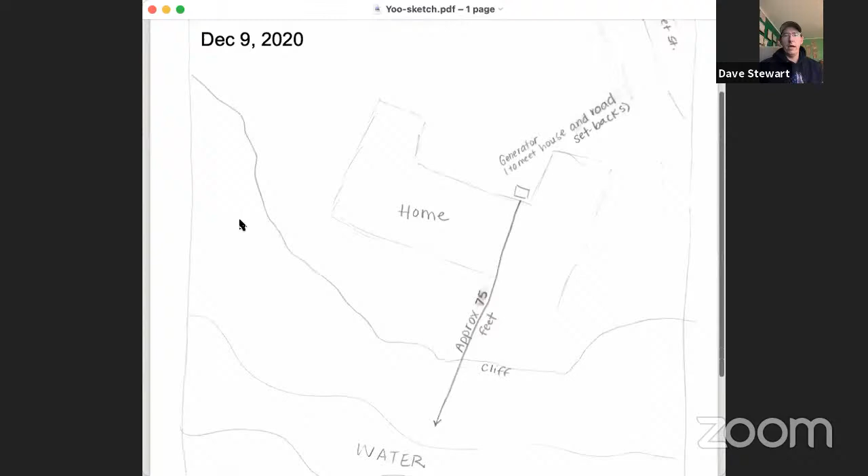Hi, I'm Dave Stewart, DS Electric. We're proposing to install a generator for Ms. Yoo at 62 East Market Street. The location we're proposing is within the setbacks of the wetlands, but the wetlands are actually on the opposite side of the home from where the generator is. So the home is in between the two, as you can see from the diagram. I believe that shouldn't really be any kind of concern. If there were any kind of issue, it would have to actually go through the home in order to be a problem to the wetlands.

All the other setbacks should be fine. The front setback to the road isn't really visible to the house. We have pictures of that too. But basically, it's supposed to be 100 feet, and we're asking it to be shortened to 75 feet. Actually, it's to the stream. The stream corridor is 100 feet on either side of the stream, not the wetland. Gotcha, but that's what your diagram shows — it says water. Okay, I understand that.

The house was built before the 100-foot stream requirements were put in? I was going to ask the same question, but it has to have been. Do we know when the house was built? I don't know when the house was built. Okay, I have parcel access up right now — it's 1925, the original structure was. Yes, it predated zoning, quite a bit. The reality is, today you could not build a house where it is. Not without a variance.

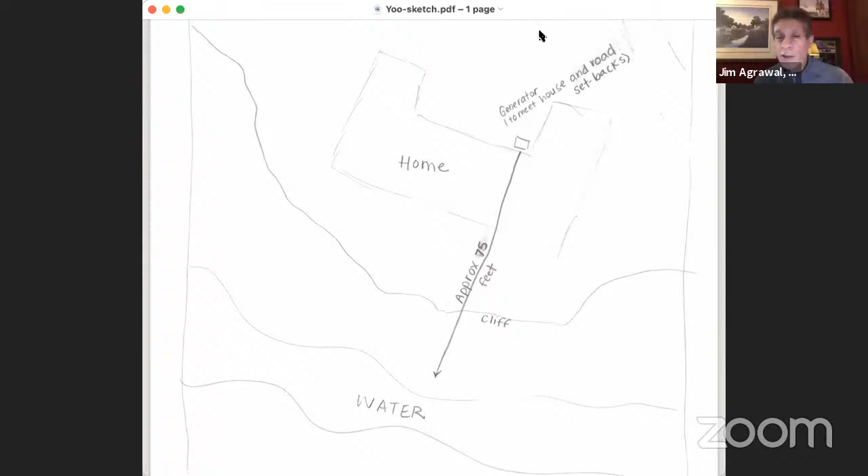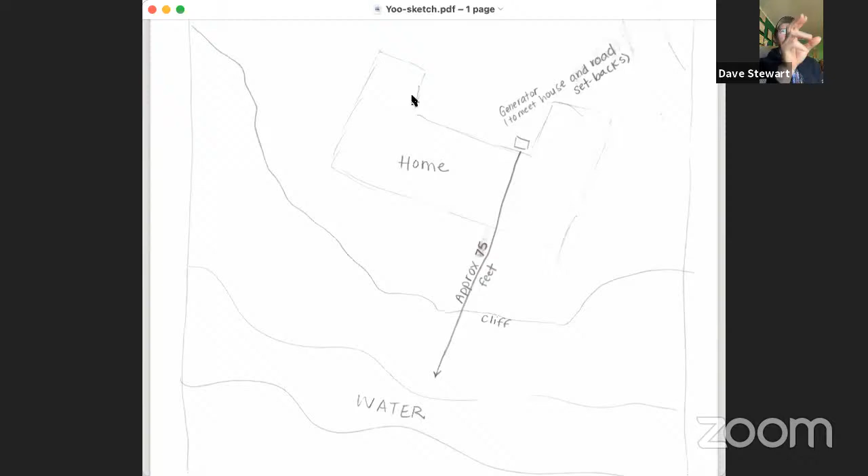Where's the front door in relation to that generator on this picture? So where the generator is, it kind of looks like a U. To the right side of the U is where the generator is, to the far left side of the U is where the front door is. Okay, that's curious. And the driveway comes in right to the north of it off of East Market. This is Pompey Delafield's old house, if anybody's familiar with it. Oh really? I should have known better.

That's a big house. Beautiful place if you've never been inside of it. Oh, I've been in there. He's got a gorgeous house, or he had when he was there. He had lots of affairs there. Now, as a town supervisor, you'd expect that.

So, who haven't we heard from? Jim, Dave, Rich, Paul, any questions? No more. Okay. And have we received any correspondence, Serena? No, we have not. Is there anyone in the Zoom waiting room wishing to speak? No, there is not. And we've asked the board members, the zoning officer. No more comments. And our attorney? No comment. Thank you.

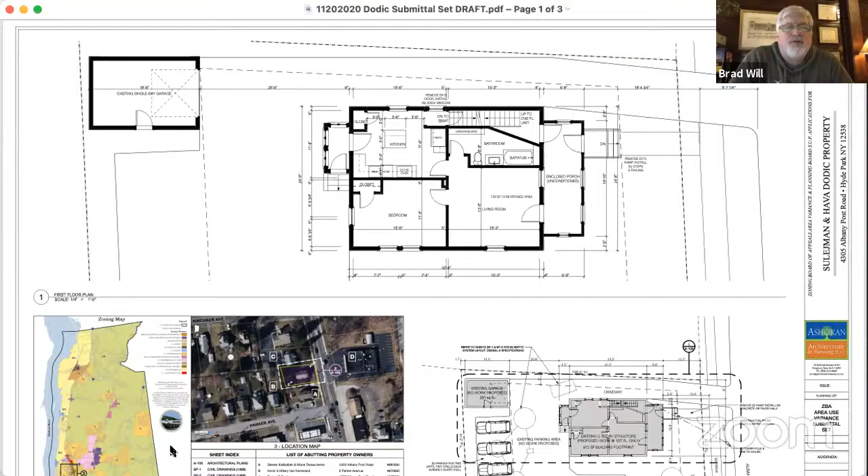So that's kind of basically it. It's a pretty straightforward plan. There's a living area in the front, the bathroom, a new full bathroom. There is an access to a basement there, you see from the kitchen, and also a small mudroom vestibule.

Brad, the front door, I see the entrance to the front door, but the entrance to this apartment, is it under the stairs or where? I'm confused now. You see where it says living room? Yeah, that's the entrance. That's the front door. Got it, exactly, through the porch.

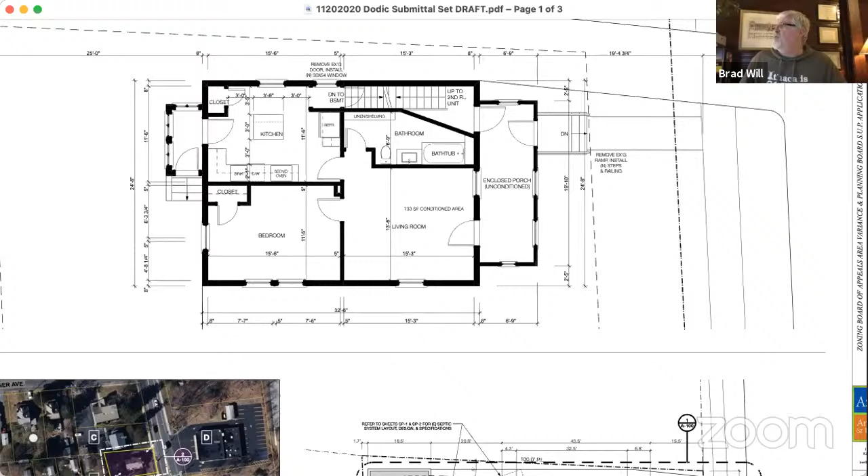You're putting a window where the other front door is, or the door near the stairs. Did I hear you? You're putting a window there? No. Well, if there's a photograph, we're taking that door out and putting a window in. If you look at the sheet, it shows it pretty clearly, I think, on sheet A100. Oh, I don't know why that's A100. That should be A101, sorry about that.

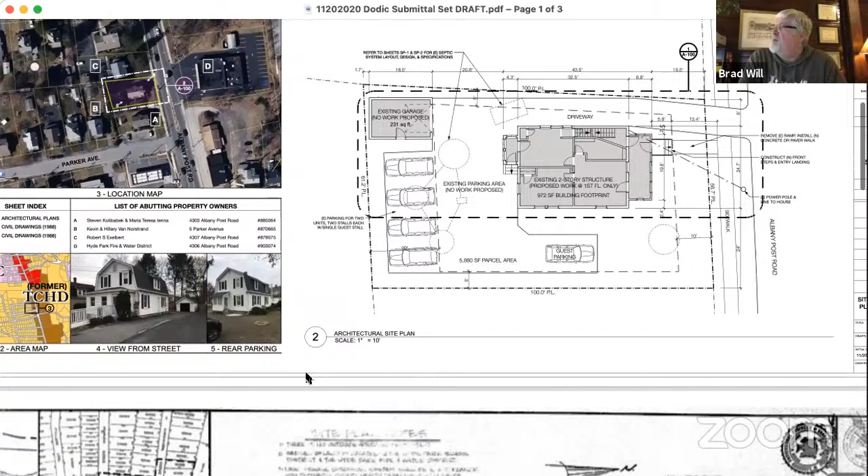So there's a photograph that shows a northeast view from the sidewalk, and there's a note on it that says the door to be removed. You can see that door just kind of floats. It's a pretty hazardous situation right now because there's no landing there, it's right up against the driveway. So it just doesn't make sense to keep that door. So we're proposing that we would take that door out and put a window in its place. I got it.

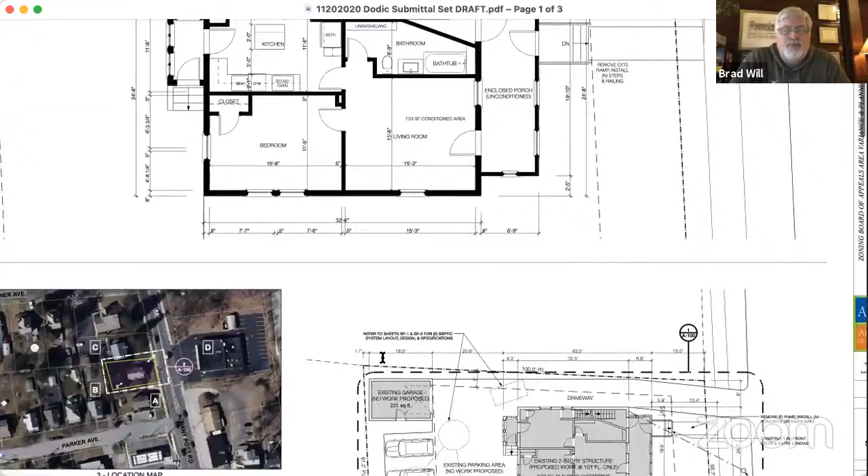Okay, and there's ample parking, as you can see in the back. Plenty of parking for two residential units plus guest parking. I think it's fair to say that there's no impact, and of course there's no on-street parking there in any event. The existing garage will remain? It will, yeah, but there's no work proposed there.

And most of the utilities are in the cellar? That's correct, yes. And if you remove that door to get to the cellar stairs, you got to walk through the house, whether there's a carpet or whatever. Well, we're not removing the stairs though, they'll stay. To get to those stairs, serviceman will have to come through the front or the back door and go through the whole house. That's correct.

You're breaking up a little bit, I'm straining to hear you. Sorry.

Yes, that's correct. I wouldn't want to rent that apartment. Well, I don't know, right where I live in Kingston, when the Central Hudson guy shows up, he has to come through our house to get downstairs to read the gas meter.

We'll put it outside. So other than the removal of the handicap ramp, the exterior will remain the same. That's correct, yes. And the entrance, come in the existing door to the porch, and straight ahead is the entrance to upstairs, and make a left turn and go a few feet, and there's the entrance to downstairs. I got it right? Yeah, absolutely correct.

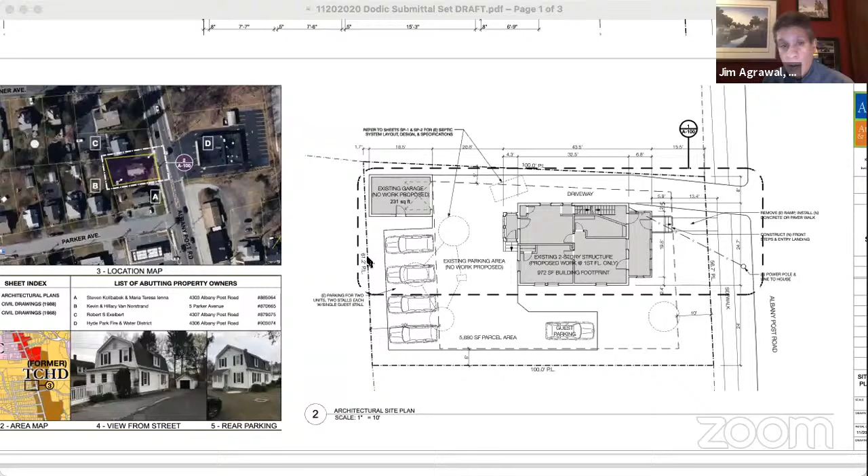Okay, and the back door on the first floor will remain, or you convert it to a window? No, to the kitchen, yeah, that's going to stay, right? Oh yeah, that's a nice amenity to have, to be able to walk out to the back and directly to the parking area. So that stays. Okay, got it.

There's a lot of uses allowed in that district, including this one. So the question for the zoning variance, if I understand correctly, is that we're going from a single house to a 2-unit house on the same footprint? Not quite. Historically it's been a mixed use building, with a clinical use on the ground floor and a residential use upstairs. Okay, so we're going to 2 residential uses of the building.

Two residential uses where the density allowed for this size lot isn't big enough, so you need to relax the density standard of so much per acre. I think it's allowed 12 now, and we're going to 14. That's correct, based on the square footage of the lot.

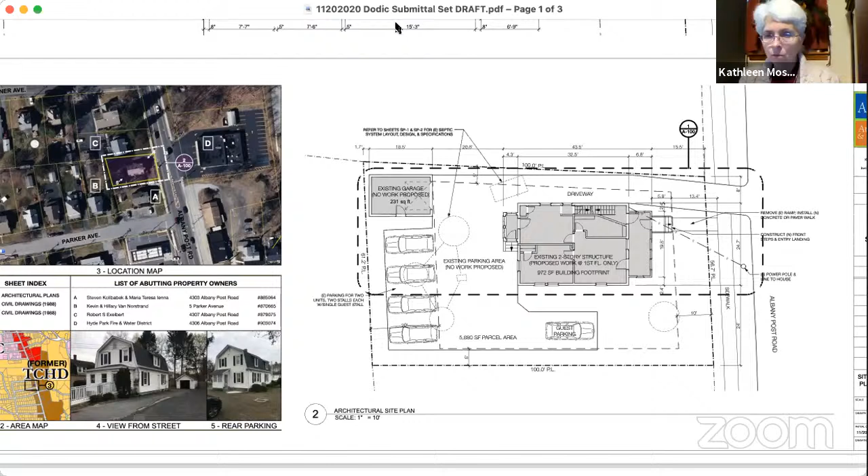So that's the reason for increasing the density. Okay, I get it, that's all we're interested in here. I think we've been through that pretty much. This does also have to go through the planning board for site plan. Yes, that occurs following the entertaining of a variance and acceptance of the variance by the zoning board. That's the process.

So what we're going to do this evening, now that everyone has familiarized themselves with this, is set the public hearing for next month. That will give the public a chance to be notified and to come and participate if they want to. May I have a motion to set the public hearing for February 24th? So moved. May I have a second? Second.

Who did the second for that? Jim. Okay. Will the secretary please poll the board? Herbert Sweet, yes. James Agrawal, yes. Paul Donnelly, yes. David McNary, yes. Richard Perkins, yes.

So the public can see the detail of this application by examining the plans, which are at town hall and at the planning and zoning office. Comments can be submitted either by mail to the ZBA Secretary, 4383 Albany Post Road, Hyde Park, or emailed to ZBASEC at hydeparkny.us, or arrangements made with our engineer in charge to come and speak if they wish. And that is all we have there.